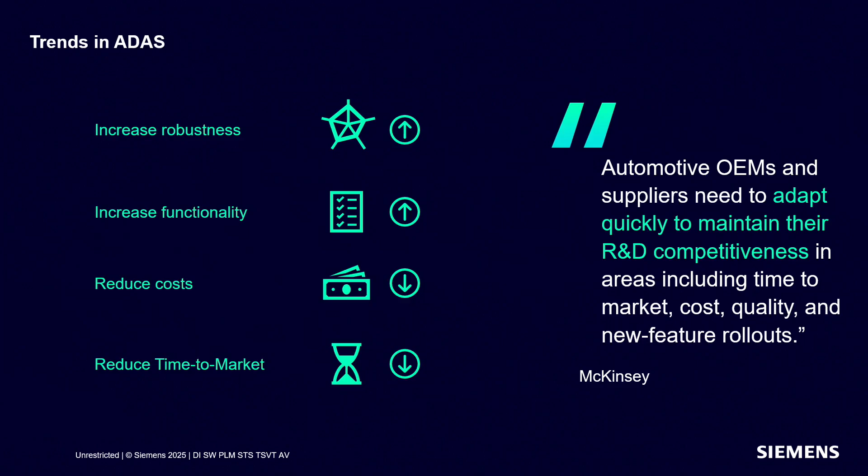And that's very well stated by the chairman of the board of BYD, who says that today it's not about the big fish eating the small fish, but the fast fish eating the slow fish. So it's all about time to market with less money and more complexity. So how does the industry deal with that?

One answer is the software-defined vehicle. So why is this an important development in the automotive industry? Because on the one hand, it allows for new application areas. ADAS AV is one of them, but also, as we heard before, AI platforms, and over-the-air updates that prolong the life cycle of the products.

And on the other hand, it's also allowing new business models. We've heard from several OEMs that are putting more and more subscription models in cars, and that's all about trying to find more monetization of the product.

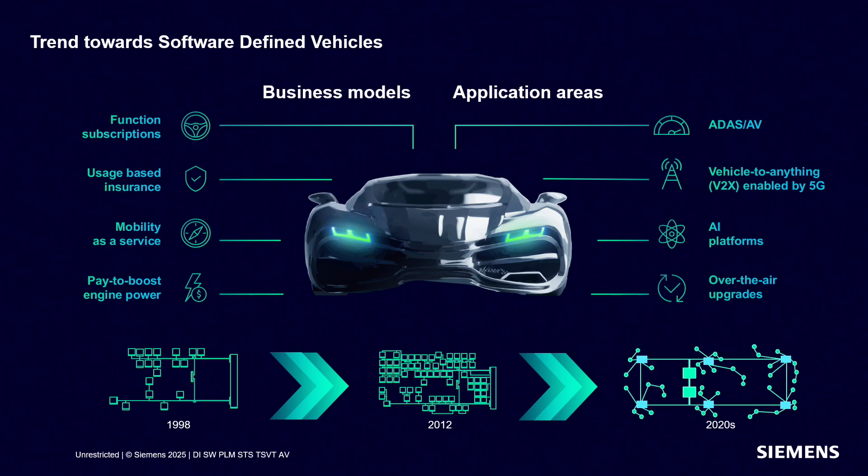With the software-defined vehicle, you also see at the bottom of the slide that the electronic architecture is changing. Where in the past software and hardware were connected to each other, in modern cars there's a more zonal architecture, as also mentioned earlier today. So software is more disconnected from the hardware and runs on high-performance compute systems.

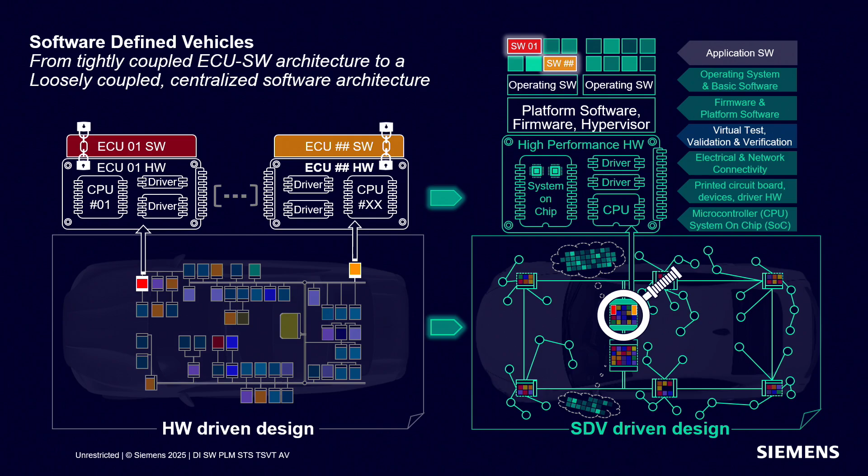And ADAS is one of the larger software systems in the vehicle. It's a very important software function because it requires high compute, which is why it moves to those high-performance compute systems. ADAS is very complex. You need to deal with all the different sensor systems, data fusion, and it also has to take decisions in real time.

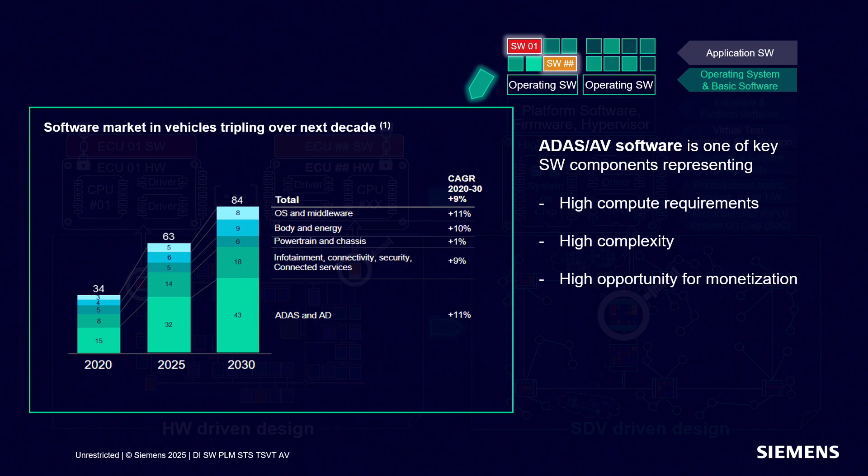But at the same time, there's also high opportunity for monetization. People are willing to pay for higher levels of ADAS. So that's also important for the automotive industry. So the high-level question is, how can you optimize a software-defined framework faster and reap the benefits of new business models? The answer we have from Siemens looks a little bit like this.

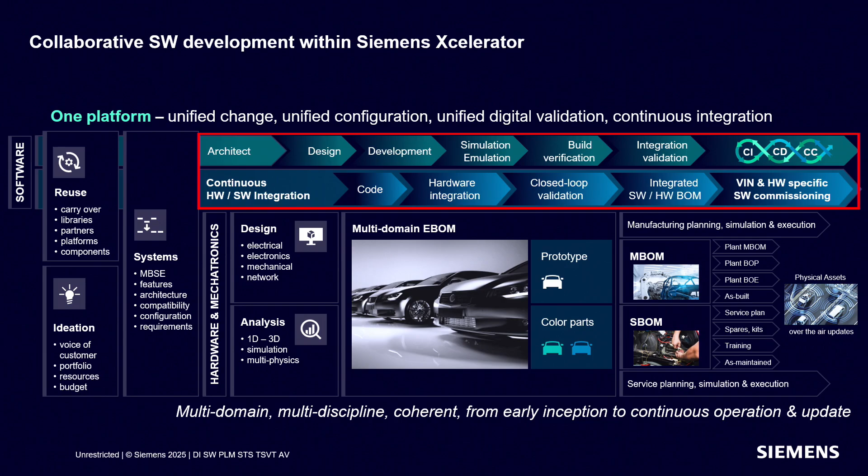Many of you know Siemens from the PLM systems. With our Teamcenter approach, we manage the entire lifecycle of products. And with the software-defined vehicle approach, we add this new layer on top of our PLM foundation. So what does that software-defined vehicle framework look like?

First it starts with product requirements and application requirements, managed by our PLM and ALM systems. In previous presentations today, you also saw the SysML activity, the system modeling you see on the side. Then we move into the architectural and design processes of the mechanical, electrical, and software components. And while we develop them, there's continuous integration and continuous validation.

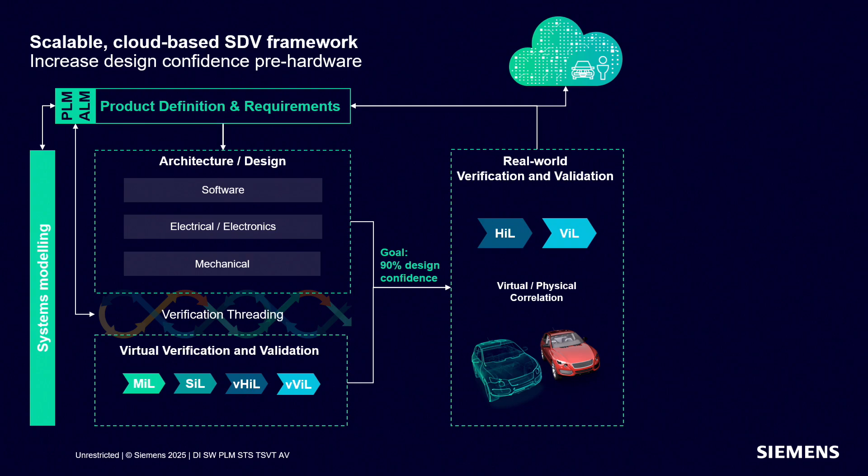At some point when you are, let's say, 90% sure that what you have developed is working fine, you move towards hardware-in-the-loop and vehicle-in-the-loop systems. You want to deploy your system only with 100% design confidence. Then you do your over-the-air update, maybe some shadow testing before you release it, and then you start collecting data again, and the entire loop starts again.

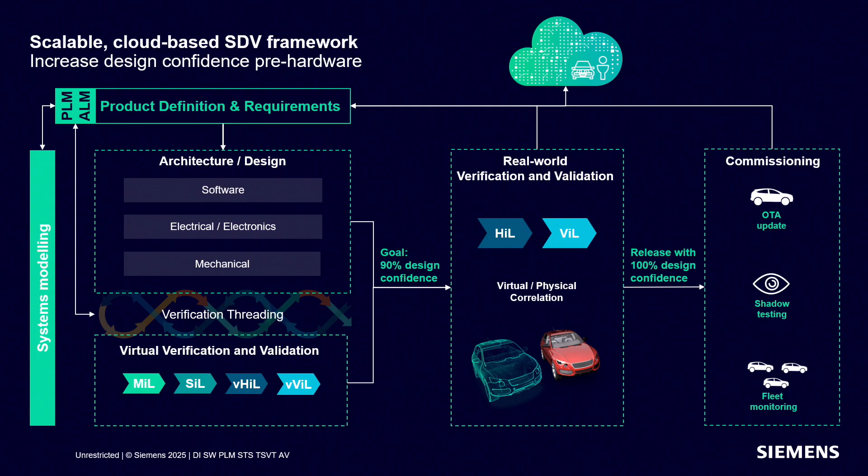Within Siemens, we see three different personas. The first persona does the mechanical development: the vehicle itself, the mechanical systems, the actuation systems, and the powertrain. On top of that, you have electronics hardware development, responsible for the electronics design, the networking of the system, and the compute systems.

And on top of that, you have your software development. The interesting thing about software development is that it basically never stops. Once the car is released in the market, you continue your software development and your over-the-air updates.

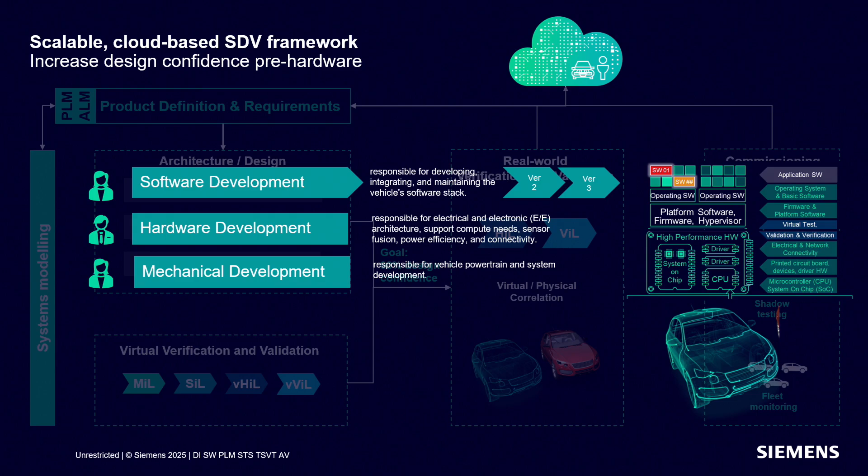So how does that software development look like? So of course, again, it starts from the requirements. You start writing your code. But at the same time and in parallel, you actually start collecting your scenario database. And I will come back to that later, but there's multiple different ways how you can build up that scenario database.

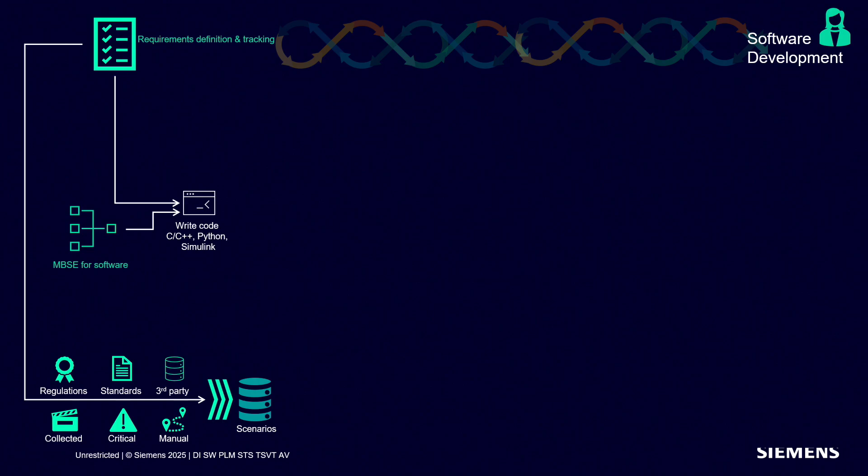And while you're writing your software, you do your verification loops. So that's typically the model-in-the-loop systems first. And at the bottom, you see your digital twins that you develop in order to test against that. So digital twin of the world, of your environment, digital twin of the sensors, but also digital twin of the vehicle, the actuation systems, and the powertrain.

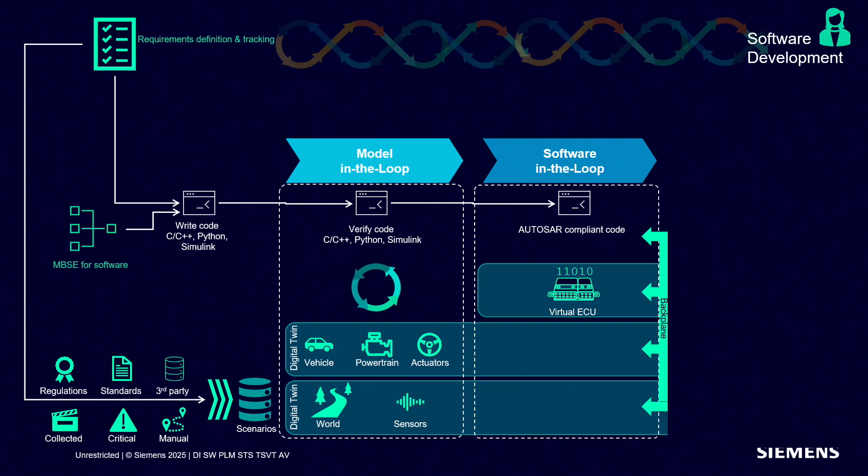And then later in the process, you compile the software, and then you run them on an AUTOSAR virtual ECU with software in the loop. And then later on, as I said before, it's basically hardware-in-the-loop testing that you do. So let me explain how we support this entire process with the different tools that we offer to the market.

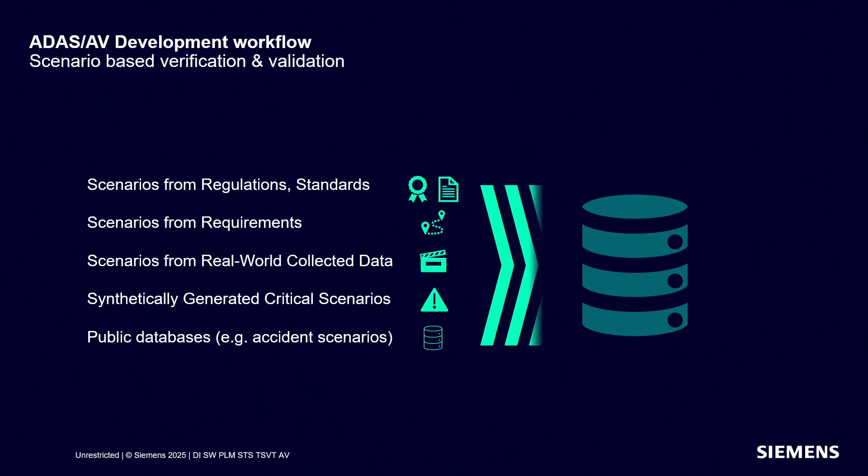So the first thing is, how do you build up actually that scenario database? So there's multiple different ways to fill your database. So one source is the scenarios from regulations and from the standards. Another one is from requirements. Most of you are also collecting a lot of real-world data from which you collect the scenarios. There's also synthetically generated scenarios, and of course there's also public databases that you can use, for example, accident databases.

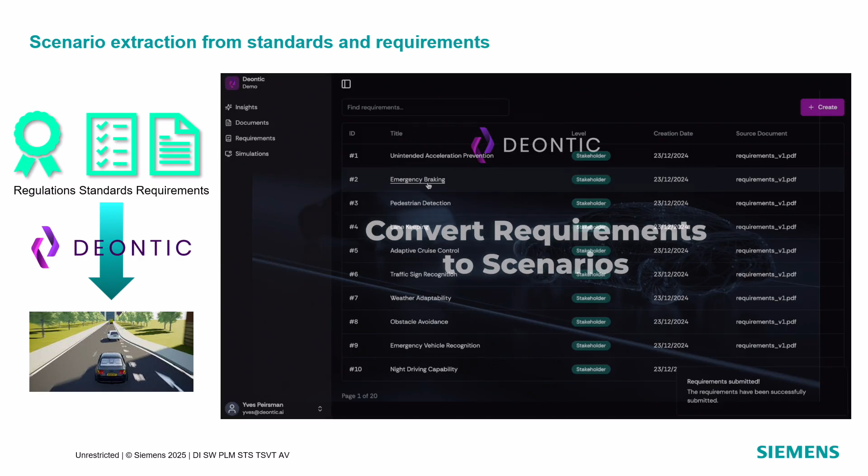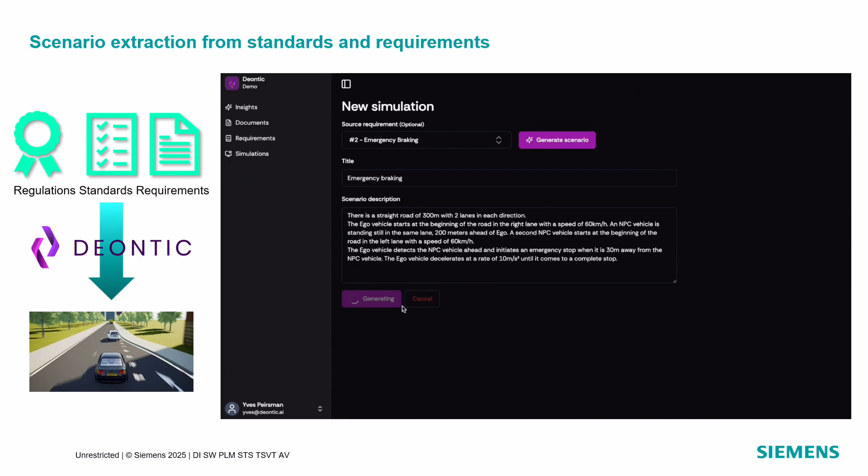To give you an example of how to extract scenarios from standards and from regulations, but also from requirements, we're working together with a company called Deontic, and they are basically able to generate scenarios from text. And you see here an example where they are taking specific standards with large language models. They convert that into different requirements and text, and they are able to generate an OpenSCENARIO file that you then can download into Simcenter Prescan, and you can then run that scenario.

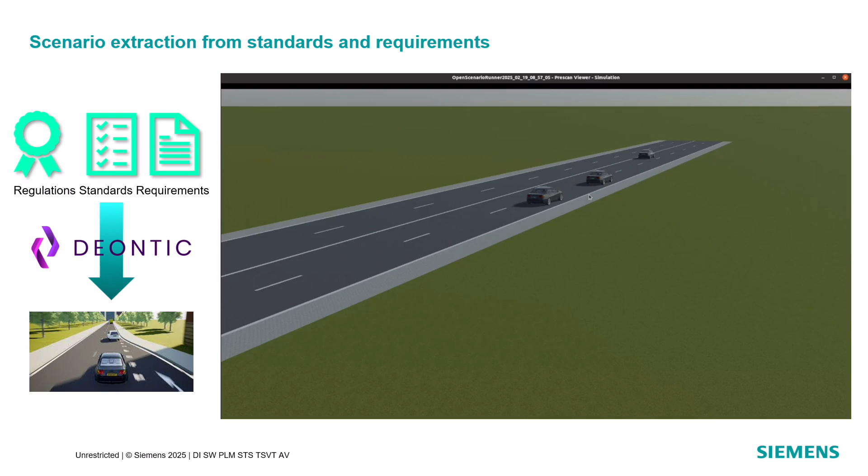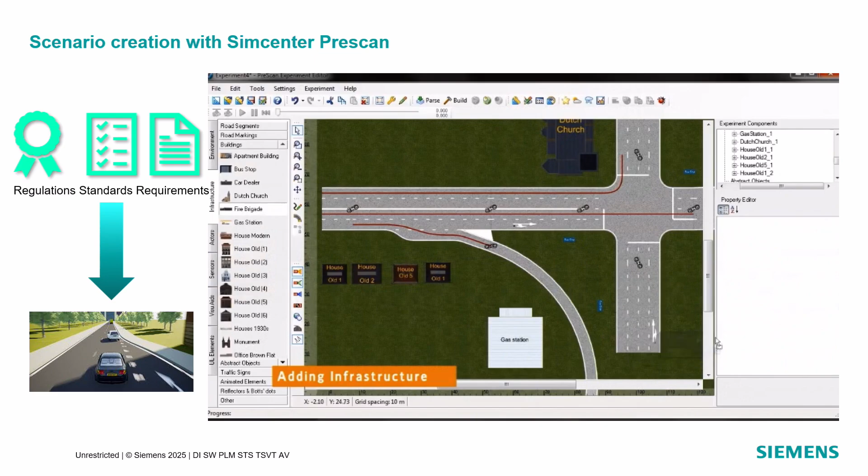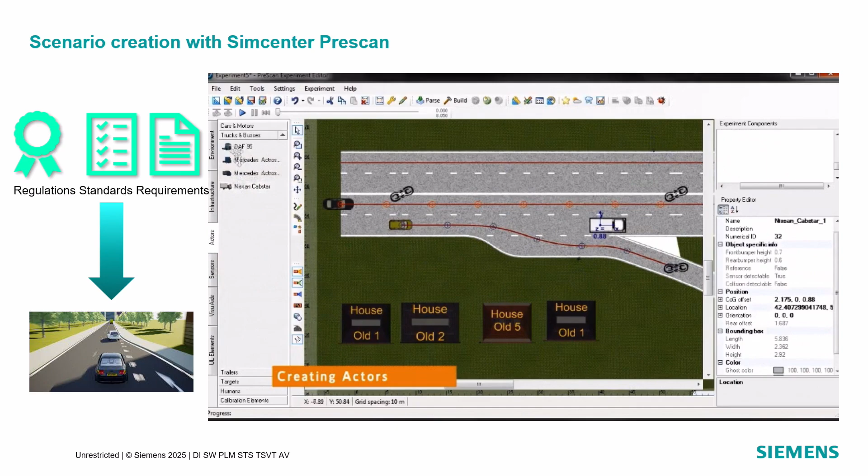Of course, this is an example of one scenario that you then run in Prescan, but you can imagine that in that way you can very easily capture scenarios from standards and requirements. Of course, there's always the possibility to build scenarios manually based on your ODD. For that, we have our Simcenter Prescan GUI, which is very easy to very quickly build very specific scenarios. And we have pre-made models of the environment and vehicles and sensor systems in the vehicle to build actually your digital twin there.

The other way to fill your scenario database, which a lot of people are doing, is by actually driving around and capturing a lot of driving data. And here you see our process to convert driving data and put it into a database, making it also searchable. So the tool at the bottom, you see that we offer a cloud-based interface towards the engineers, in which you can very easily search specific scenarios. So it automatically makes a catalog of the different scenarios, cut-in, cut-out scenario, emergency braking scenario. And you can also specify your own KPIs, and it automatically will pop up with the scenarios that have not met your requirements. And then you can further dig into the details.

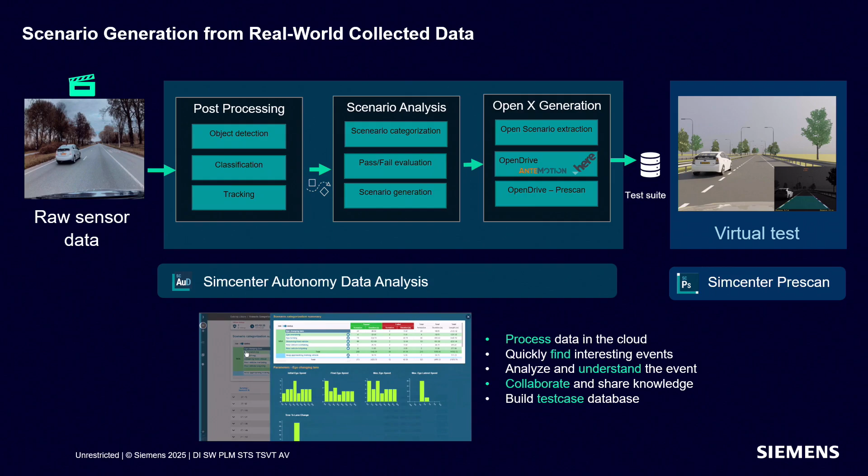Once you have selected scenarios of which you say, hey, these are interesting ones, you can select them and you can store them in your database. You can store them for replay. But one of the things that we're also working on, in collaboration with some partners like Antemotion, who's also here, and HERE Technologies for the map data, we can convert these driving logs into digital twins, very accurate digital twins, that you then further can process also in our Simcenter Prescan program for further testing and analysis.

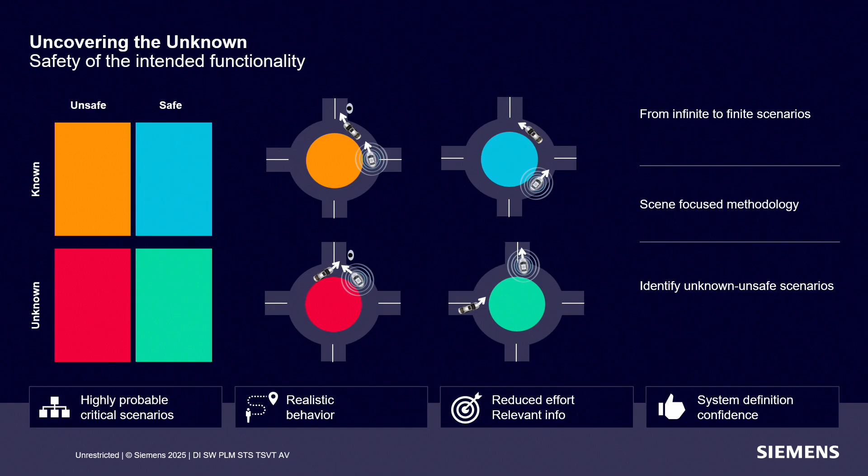Now, this example of safe and unsafe, and known and unknown scenarios has been on the slides already many times today. With the previous examples that I presented in order to fill your database, you typically find the known scenarios, safe or unsafe, but you typically have not captured the unknown scenarios. And that is always the difficulty, to find the unknown, unsafe scenarios. And for that we have developed an automatic methodology that generates unsafe, unknown scenarios. You typically can do that in two ways.

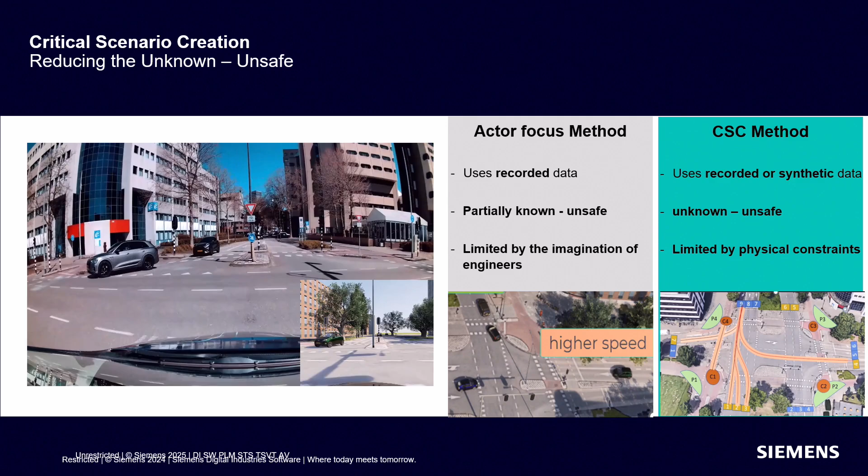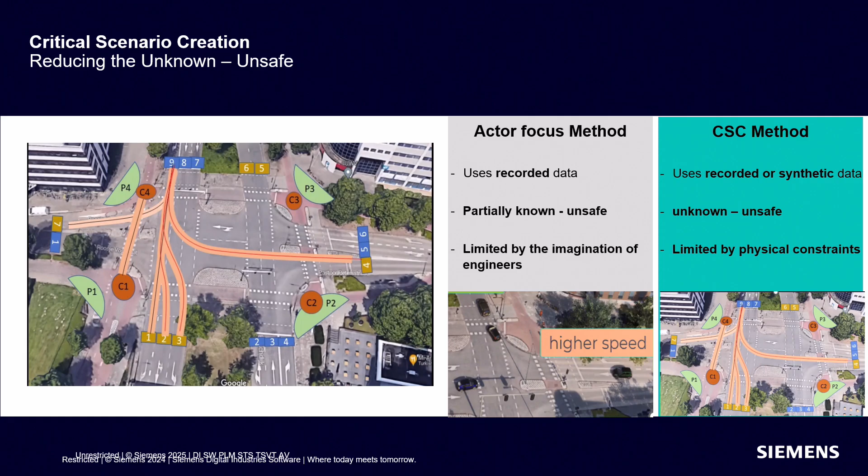So one way is the actor-focused method. So there you take an existing scenario and then you start changing parameters in order to make that scenario critical. So it can be, you're crossing an intersection and then you start changing the speeds of the other actors in order to make the scenario critical. That is actually how most of our competitors are doing it. But we have come up with a very unique other method, which completely generates new scenarios that you have not seen before, but are possible and plausible as well. So we have a patented approach there that optimizes the scenario generation towards critical scenarios, but also very probable scenarios.

And in that way, the projects that we have run with our customers always show that we have been able to find scenarios that people have not been thinking about. And then in retrospect, they say, yeah, this was typically a scenario that we did not think about, but it is indeed possible, and we should add it to our database.

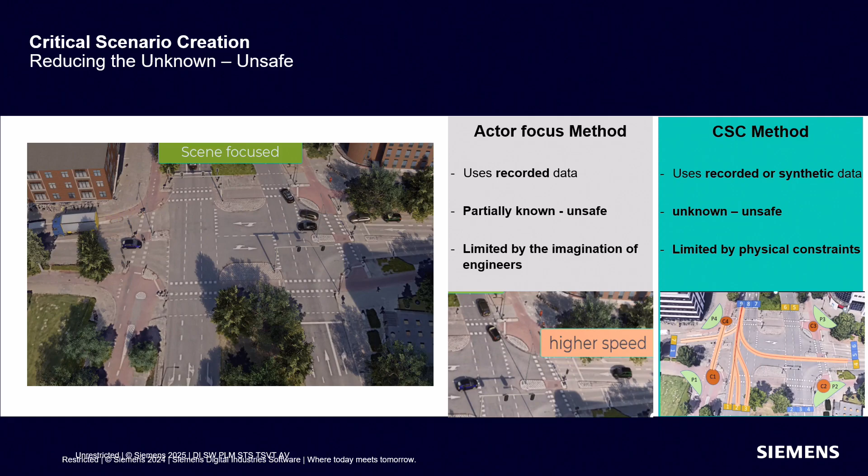So this is a very, very nice way of completing your scenario database according to the SOTIF standard to minimize the amount of unknown, unsafe scenarios. I'm not going to say that we will find all the scenarios that are possibly out there. There will always be kind of residual risk, but I can assure you that with this methodology, the residual risk that you have is minimized.

Once you have built your software and have filled your scenario database, you typically want to do a continuous integration loop. Typically, you do that on the cloud. We can run massive amounts of simulations. And we have set up continuous integration pipelines so that when the code is uploaded, you automatically run these continuous integration pipelines, for example, on the AWS cloud, to run through these massive amounts of scenarios to validate your software.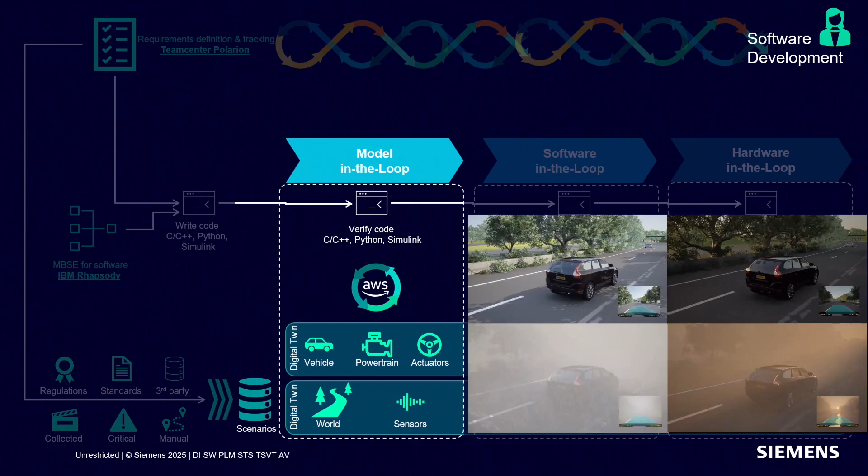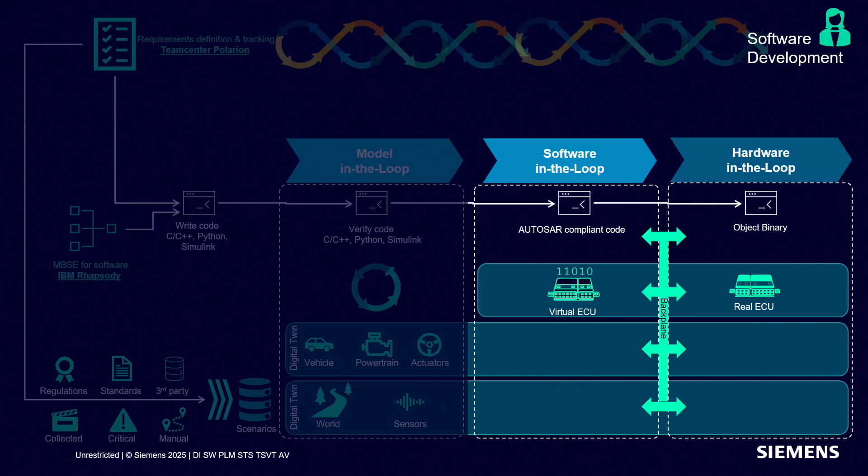And as I said before, when you are confident about your software and your functionality at some point in the process, you start to compile your code, and you want to validate also whether that code runs on the hardware. And also here we have a very interesting offering with our PAVE360 offering, which basically provides a kind of virtual car to every engineer's desk. So we use virtual ECUs, virtual hardware, on which you can actually run your compiled code.

The interesting thing here is twofold. On the one hand, you can start building code for hardware that does not exist yet. So you don't need to wait until the actual hardware is available, and you can already start testing your code against new chipsets, for example, that will become available. That is one reason why people do this.

But the other reason is also that even if you have the hardware available, hardware rigs are very expensive and are typically not available in very big quantities. So with virtualizing the hardware, you can actually also again run it on the cloud, and you can have multiple instances of your virtual car available at every engineer's desk, so you can run your software against that very easily.

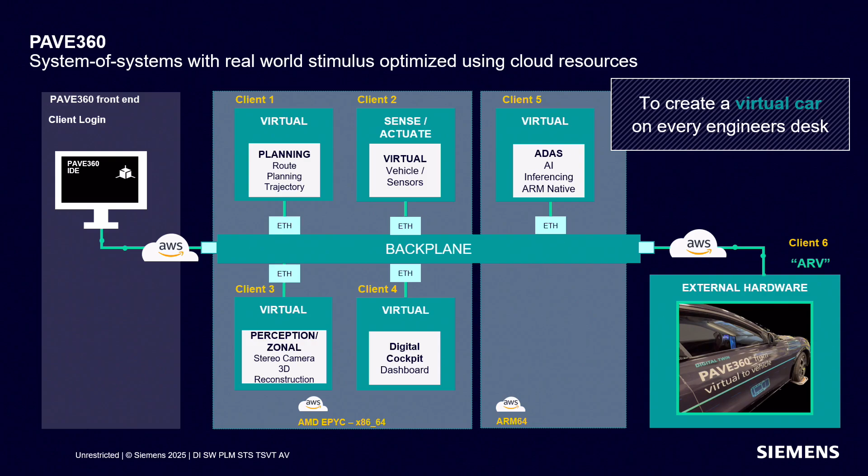The benefit of this system is that it is able to handle mixed reality. So you can have everything virtualized, but the moment you build up your car, you can start moving more and more real hardware into it. Part of it can run on the cloud, part of it can be run in your lab, and it's completely synchronized and working in real time. So it's a very powerful way of moving gradually from full virtual towards full real in the end.

Hardware in the loop, as I said before, can exist in various different flavors. And here we have this matrix where we go from everything virtual to everything real, and every flavor in between. You can have your vehicle, for example, real, or your sensor real, or your ECU real, or only the ADAS controller real, or every mix that you can think of here. And with the PAVE360 setup, you can really mix and match all these different activities.

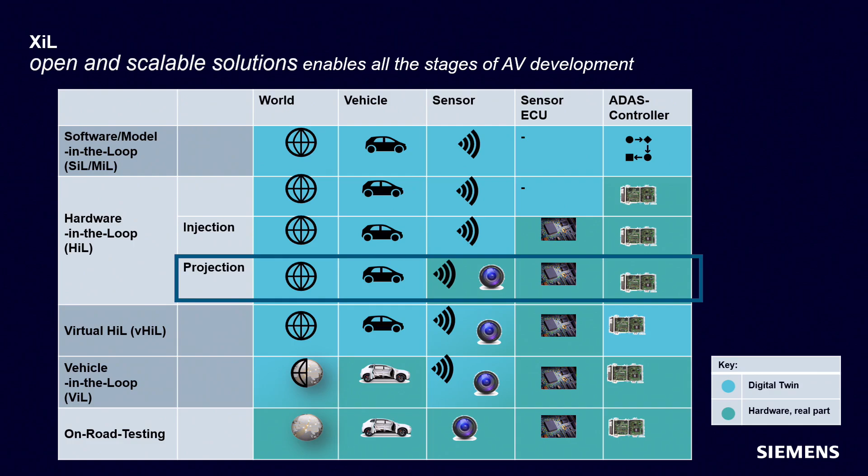And one example I wanted to give you is what is boxed here, the projection hardware in the loop. Typically, it's well known for camera systems. So you have a real camera that's watching a virtual projection on a screen. But in collaboration with Keysight Systems, we have actually built this also for a radar system.

And I don't know if you visited the Keysight talk earlier today, but Keysight built this radar scene emulator that basically is a kind of screen, a pixel screen. I learned this morning that they call it Rixel, where they can provide real radar images to a real radar.

And by combining that system with our physics-based sensor simulation system, Simcenter Prescan, you can run very interesting setups where you have very complex environments, in this case with a bus and a pedestrian and a bicyclist, and you can actually see the radar measurements coming towards you, and then, of course, based on these radar measurements, you can test and validate if your perception systems are picking up the right objects.

And because we have these physics-based radar pipelines, we could relatively easily connect to the Keysight system that normally is used to replay data, but with the simulation system next to it, you can actually start running it in closed loop, so it has more potential and more usage for your system.

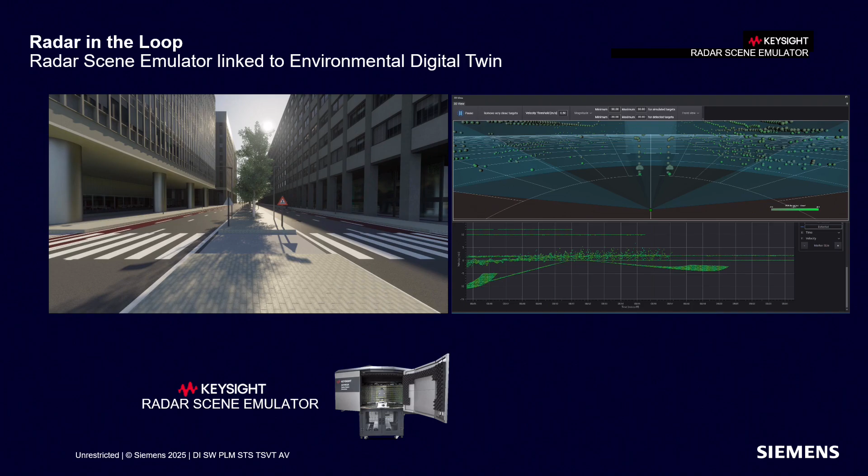We have seen many examples in the last few years where that interaction didn't go well, and the software that these engineers were building was actually too heavy for the compute systems that were ordered, and when the integration went together, the systems were not performing well. By virtualizing the hardware and doing that co-development in a virtual environment, you can prevent these types of mistakes.

Of course, as Siemens, we are very much for open platforms. So we are also part of the ASAM committee. We very much support open industry standards. All the software that we build adheres to these industry standards, such that we have a very modular approach, and we can very easily integrate our software solutions in pipelines that already exist. And with that, we make it also future-proof for all your ADAS and AV development.